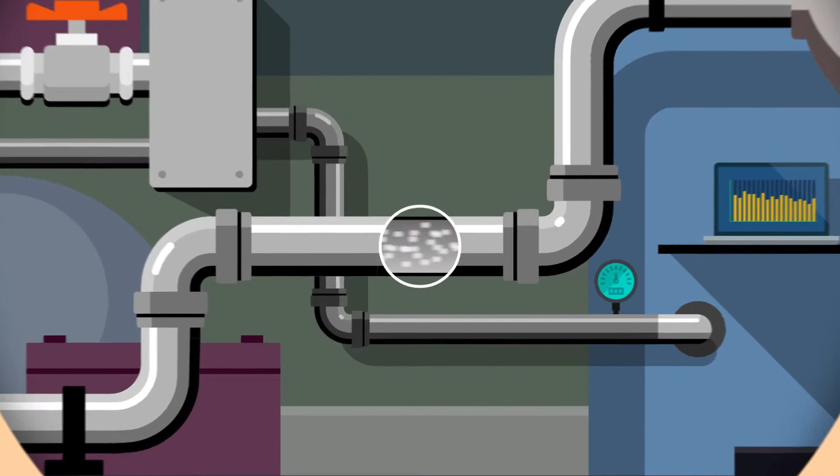Accurate flow measurement is critical for today's industries for process control, cost management, and sustainability. Ensuring those accurate flow readings can be challenging. Many large facilities and industries that use steam or chilled water have tight spaces for their piping. Without space for straight pipe runs, flow disruptors render meters inaccurate.

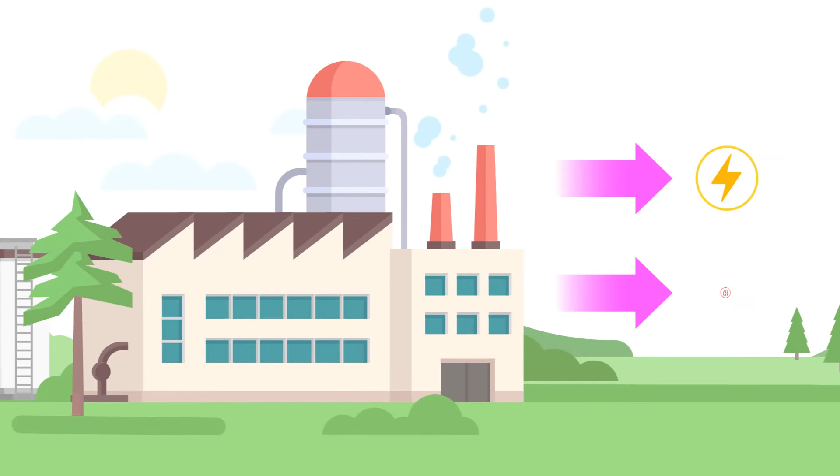Seasonal changes in usage or facility retrofits make turndown an issue too. Another challenge is the need to measure corrosive and volatile materials, such as those found in the pharmaceutical or chemical industry. And cogeneration plants must measure wet gases that can damage meter components. McCrometer's V-Cone and Wafer-Cone flow meters are designed to meet these challenges.

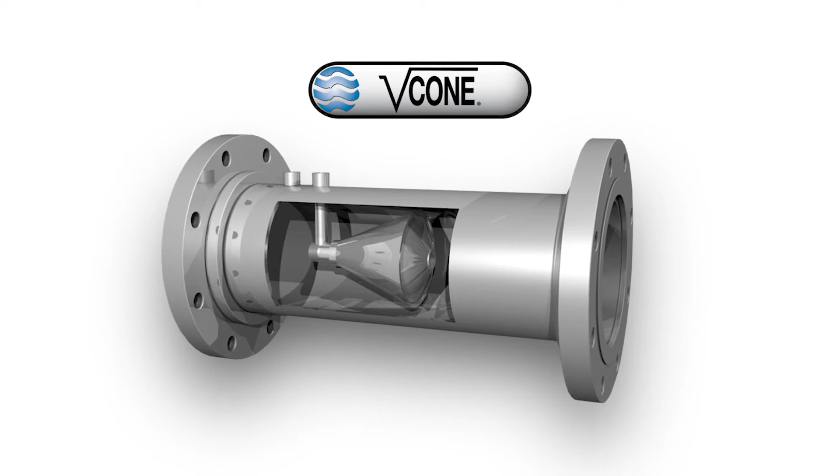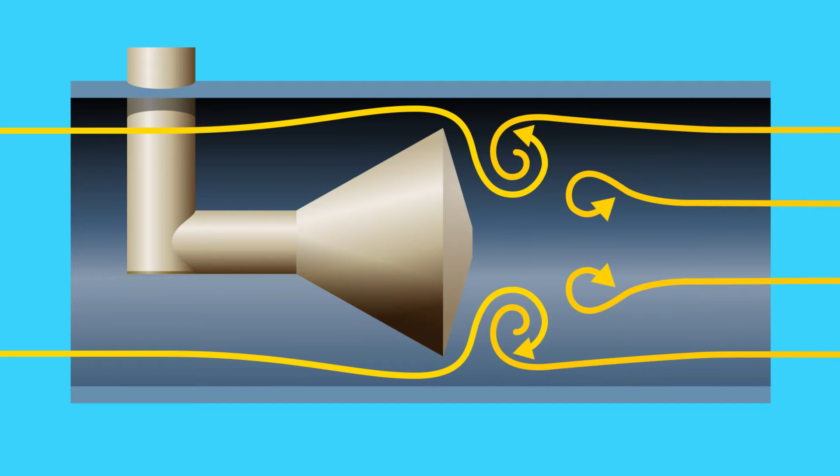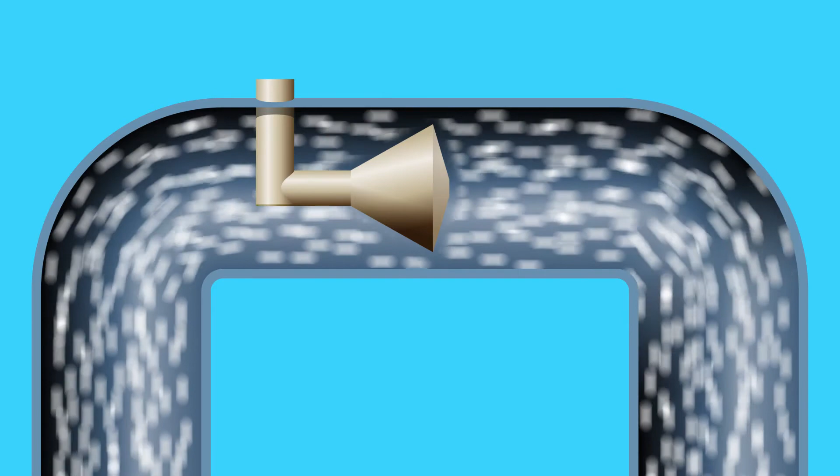The V-Cone is an advanced differential pressure type flow meter with a cone mounted in the center of a tube. The cone reshapes the velocity profile, conditioning the flow. The V-Cone needs 0 diameters of straight pipe to provide a 0.5% accuracy, making it an excellent meter for tight fits and retrofits. V-Cone can also accommodate great turndown for changing flow conditions.

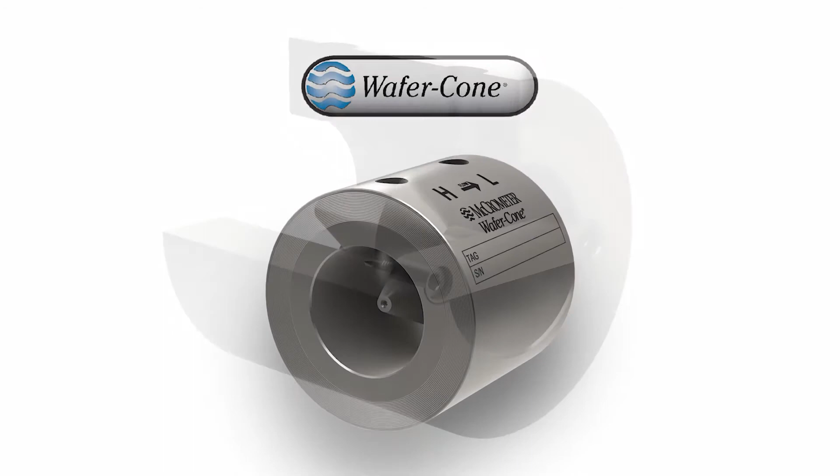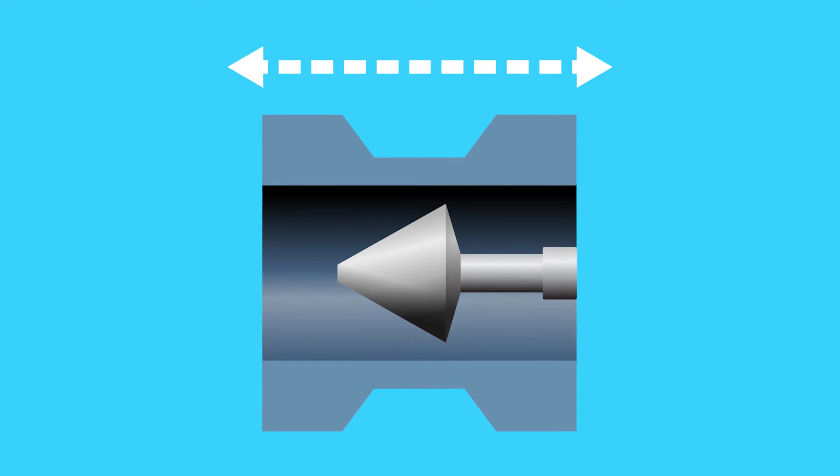The Wafer-Cone offers similar flexibility for smaller line size applications. The Wafer-Cone uses the same measuring principle as the V-Cone. It needs a straight run of only 1 to 3 pipe diameters upstream and 0 to 1 downstream to provide a 1% accuracy of actual flow.

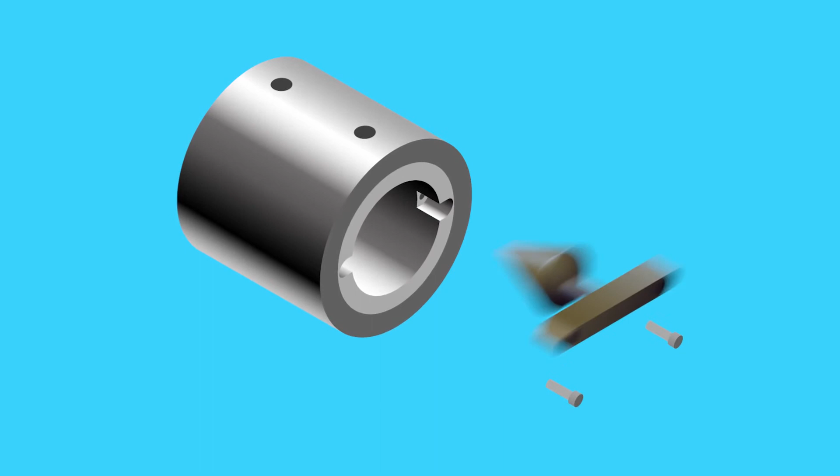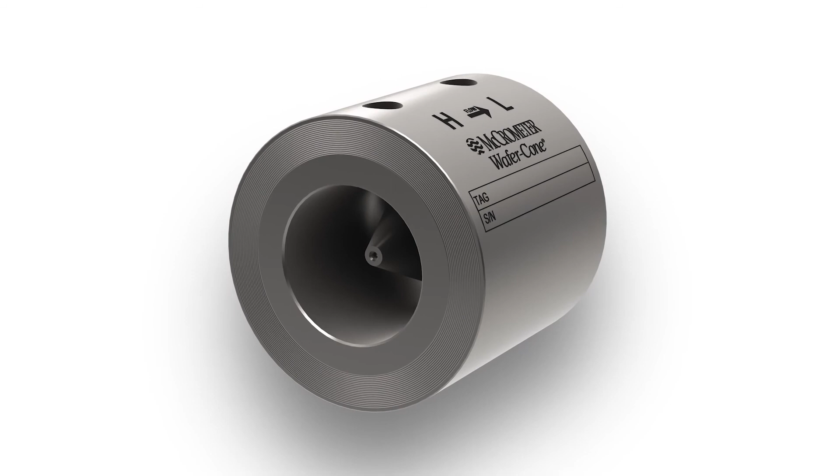Wafer-Cone also provides changeable cones to measure different flow levels for processes where flows vary over time. Cones can be changed in less than 5 minutes, and recalibration is not necessary. Both the V-Cone and Wafer-Cone are rugged, low-maintenance meters and can be manufactured with corrosion-proof materials for harsh environments.